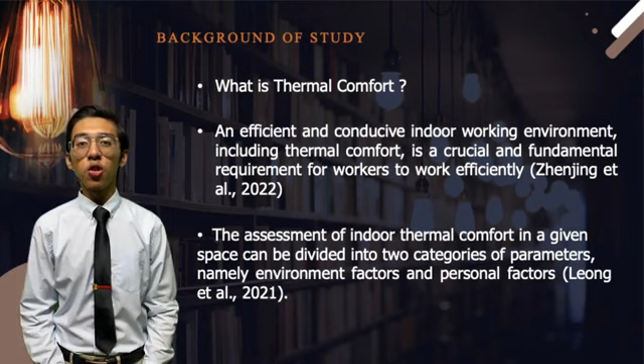Ladies and gentlemen, thermal comfort is the condition of mind that expresses satisfaction with the thermal environment. A study in 2022 states that an efficient and conducive working environment, including thermal comfort, is fundamental to the workers. This assessment can be measured by two factors, which are environmental and personal factors.

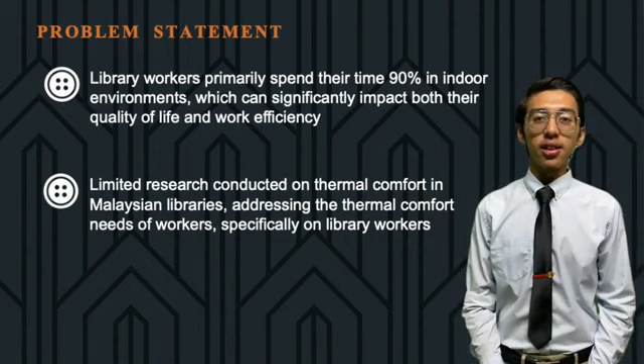This is my problem statement in this study. Most of the workers spend their time in indoor environments, and the second one is there is very limited study about thermal comfort in Malaysian libraries. Next, we go to the objectives of my study. The first one is to investigate thermal environmental parameters in different working areas, and the second one is to assess workers' thermal comfort using a questionnaire.

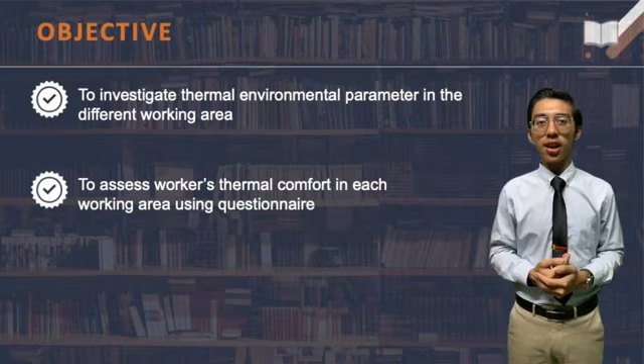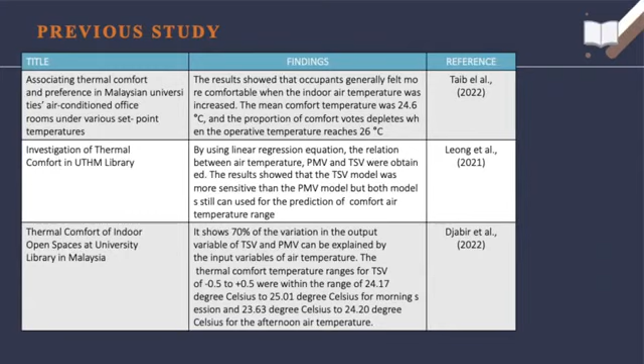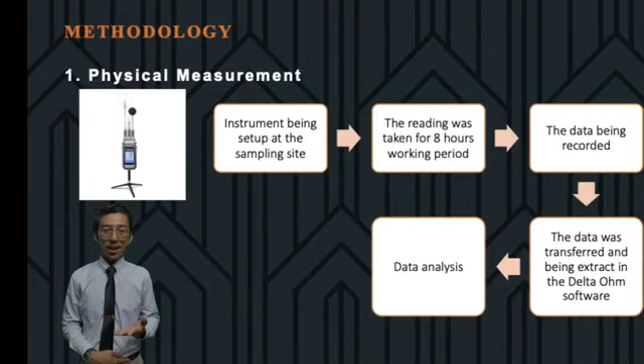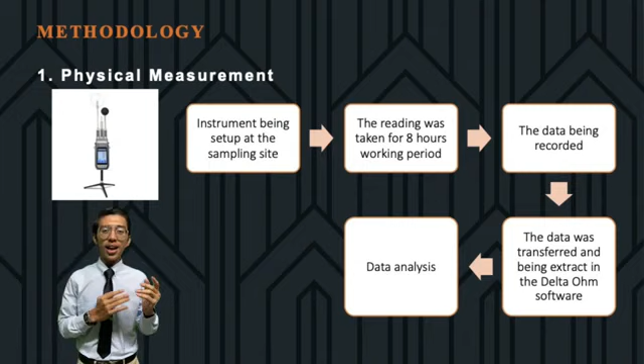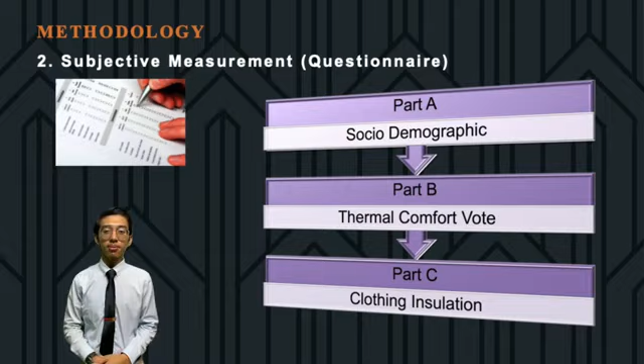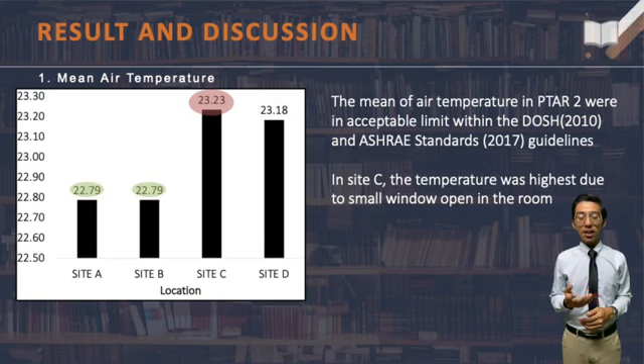Ladies and gentlemen, this is my result that has been analysed for each sampling area. Firstly, for mean air temperature, we can see that site C has the highest value, which is 23.23 degrees Celsius compared to the other sampling areas. The value is still within the acceptable limit range in ASHRAE and DOSH.

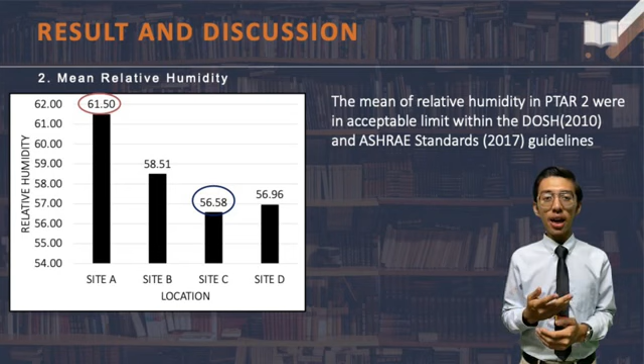Next, for the mean relative humidity, we can see that site A has the highest value compared to the other working areas. The value is 61.50%, but this value is still in the acceptable limit range set by ASHRAE and DOSH. Next, for the mean air velocity, site A has the highest value, which is 0.13 compared to the other working environments. This is still in the acceptable limit in ASHRAE and DOSH, which is stated as 0.15. One of the reasons this reading is highest is that site A is near the main entrance.

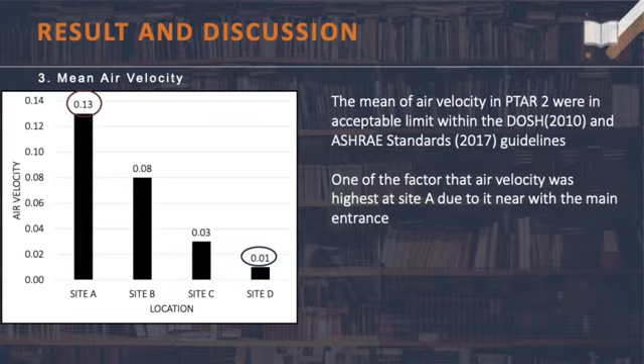Dear fellow judges, this is my subjective measurement result. Firstly, thermal sensation vote, TSV. The result shows most of the workers feel neutral and comfortable in their working environment. But there are a few workers who feel slightly warm and slightly cold in their working environment.

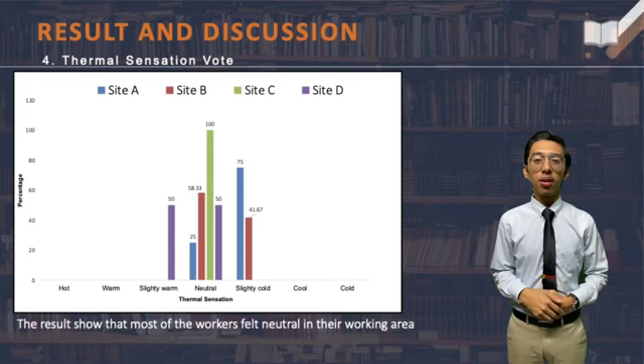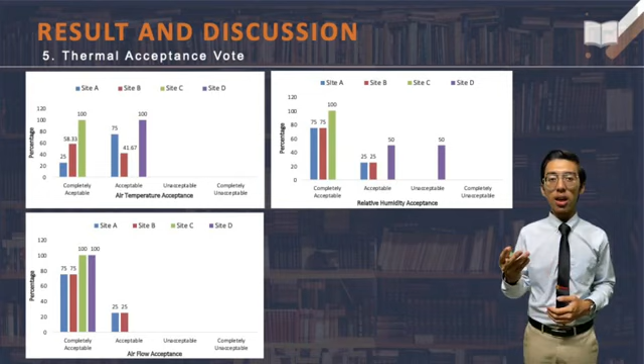Next, the thermal acceptance vote. We can see that most of the workers accept the air temperature and airflow. The graph shows most of the workers vote completely acceptable and acceptable with their working environment. For relative humidity acceptance, most of the workers find it completely acceptable and acceptable, but there are several workers who feel it is unacceptable. This is probably because of individual perception towards relative humidity in their working area.

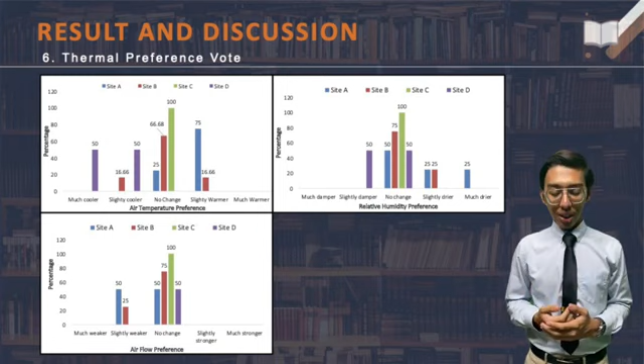Next, for thermal preference vote. Firstly, for the air temperature preference graph, we can see that most of the workers prefer no change in their working environment, but some of the workers prefer it cooler or warmer. Secondly, for relative humidity preference, most of the workers vote for no change. Some workers prefer more dry, and several workers prefer slightly damper. Lastly, for airflow preference, most of the workers prefer no change, but some workers prefer slightly weaker airflow in their working environment.

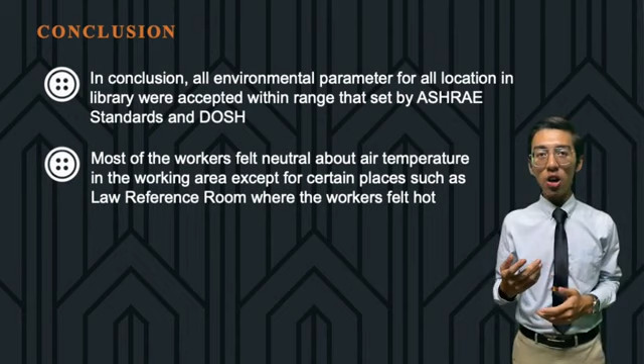Dear fellow judges, for my conclusion, all environmental parameters in my study in all locations were within the acceptable range set by ASHRAE Standard and DOSH. Secondly, most of the workers felt neutral about air temperature in their working environment, but for certain places such as the Law Reference Room, the workers felt hot in their working environment.